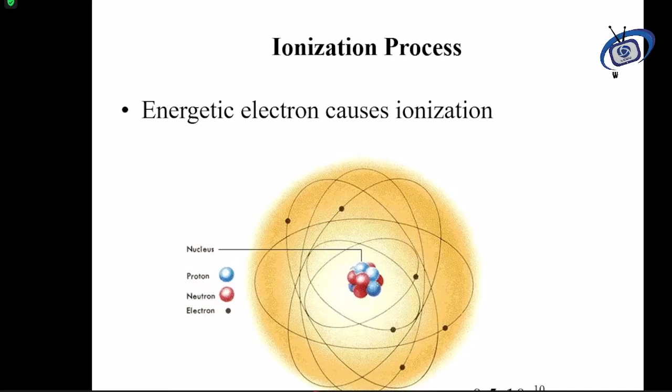No, sir, it's okay. Okay, so today I'm going to talk about the deposition of oxide thin films using a plasma system. So I start from the very basic thing, which is ionization. In ionization, basically you give energy to the electrons and they leave the atom, and the atom becomes ionized. So this is the basic part of the plasma, this ionized gas. And there are three processes occurring in the plasma: absorption, spontaneous emission, and stimulated emission.

And when we define plasma, plasma can be defined as an ionized gas, but not necessarily is every ionized gas a plasma. The ionized gas should have two kinds of properties. Number one is the collective behavior, and the other one is quasi-neutrality. If any gas has these two properties, you can call it plasma. So plasma is not a neutral, but a quasi-neutral system.

In plasma, we have long range forces and short range forces. Long range forces are basically responsible for the collective behavior, which is Coulomb's law. And that is the very basic part of the system. The other one, the short range forces, occur when two atoms or molecules fuse together. Repulsive and attractive forces occur, and this formula is given here.

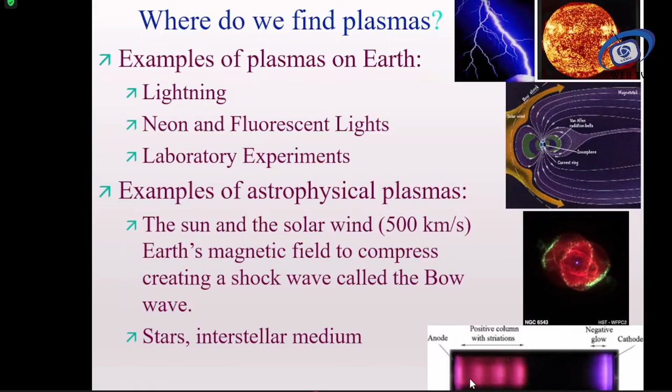So why are we interested in plasma? The first and foremost thing is fusion energy, which is a potential and safe energy, and it is abundant on Earth. The other one is astrophysical plasma: whenever you go out of the Earth's atmosphere, you actually interact with plasma. So understanding plasma helps us to understand stars and stellar evolution, which is an important part of astrophysical

systems. The upper atmospheric dynamics of the Earth: the upper atmosphere is plasma, so it is used in communication systems. So we can say that this is also important. And the other plasma applications which we employ here in the lab: plasma can be used to build computer chips and clean toxic waste. And I'm giving two diverse applications.

There are plenty of applications. We work on non-equilibrium plasma used in the processing of materials. In plasma, we can use chemical synthesis, plasma spraying, diamond film deposition, and ceramic powder. You can make plasma out of that, and then you can deposit it on the systems. Light sources, high intensity discharge lamps, low pressure lamps are being used in the world now, and special kinds of light sources as well.

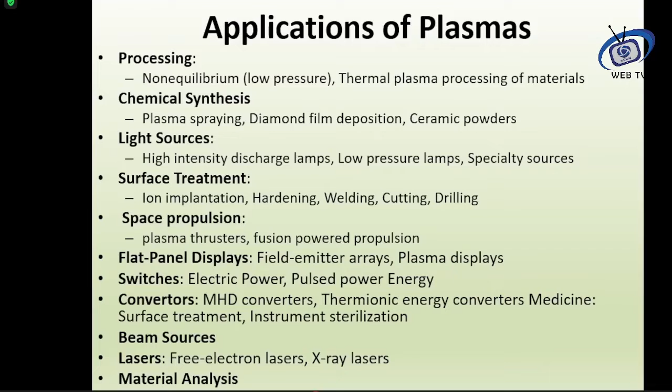So it can act as high power switching, and converters, magnetohydrodynamic converters, thermionic energy converters, surface treatments, instrument sterilization, and lasers: free electron lasers, X-ray lasers, and all kinds of gas lasers. They contain plasmas. High power radio frequency sources, even material analysis. With X-rays, you can analyze the material.

And microelectronics devices; there is plenty of work going on in the world. Fluorescent lights, television, displays are estimated to be a $200 billion business. And the semiconductor industry is a $250 billion business, where it is used in different kinds of setups. Without it, the $2 trillion telecommunication industry would not exist. So plasma technologies are serving them. Also biocompatibility of surgical implants, sterilization, and plasma-aided surgery devices.

Plasma can be divided into two main groups. Number one is high temperature plasma, and the other one is low temperature plasma. But it is further divided. High temperature plasma means the temperatures of electrons and ions are almost equal, and the electron density is greater than or equal to 10^20 per cubic meter. And low temperature plasma means the temperatures are almost equal, though the temperature is about 2 × 10^4 Kelvin.

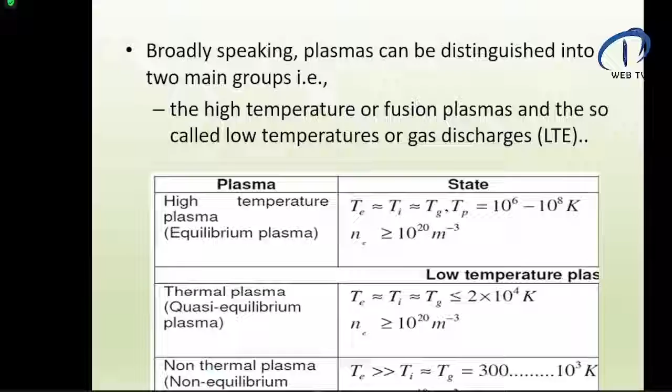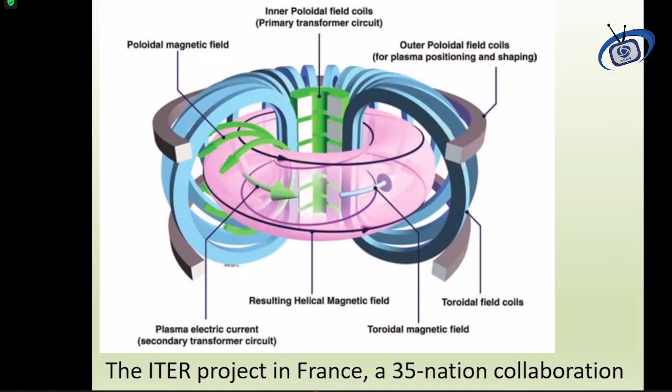Fusion is when we use deuterium and tritium and heat them to 150 million degrees. We receive neutrons and helium, and the neutrons carry the energy. Presently fusion is important because the ITER program in France is a 35-nation collaboration. They are designing it with a $20 billion budget, so it's a huge project, and they think they will be making a reactor for energy.

So fusion energy matters all over the world, because energy consumption all over the world is increasing. For example, China used 120 gigawatts, but now they are using 500 gigawatts. In 30 years' time, they increased almost 4 times. And India has increased even 5 or 6 times. So we need an energy source which can give us this kind of energy.

So plasma can be confined in 3 basic different methods: magnetic confinement, using magnetohydrodynamics, for example the stellarator; gravitational confinement, which is present in stars and suns; and inertial confinement using lasers.

So inertial confinement, you have a laser from the 4, 5, 6 sides, and it compresses the plasma, and then can have it raise the temperature about 100 million degrees centigrade. So we can have then plasma over here, and we can use that energy for the reactor.

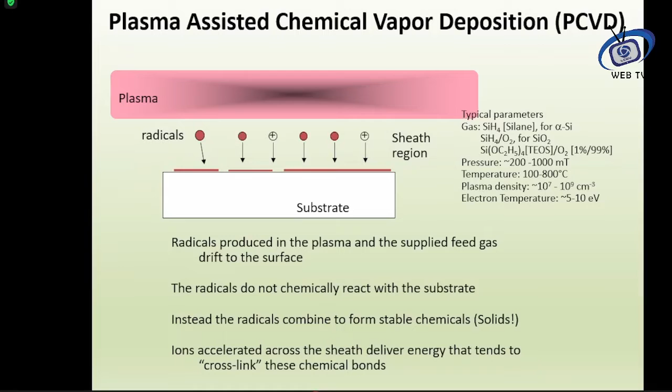and the ions coming from the plasma, they interact with the substrate, and then they become part of the substrate. And radicals, because they don't have so much energy, so they react in the plasma but not on the substrate. So they will form cross-linked, and then the film grows on the surface.

and during that they pass through the plasma, and they have some kind of reaction with the plasma species, or they will then adsorb to the substrate and then diffuse into the substrate, and they form the nucleation and the film forms. Nucleation occurs and the film forms onto the substrate.

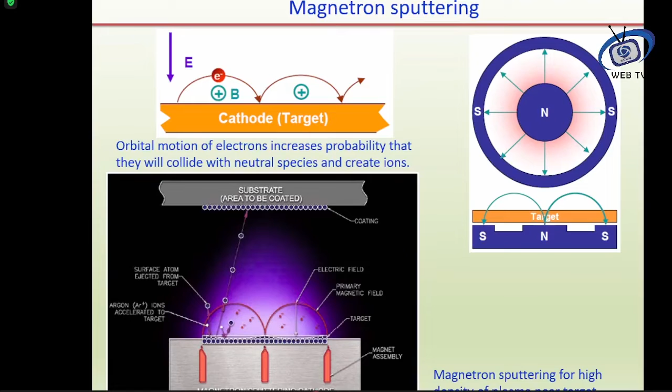So the other part is the radio frequency plasma system. So radio frequency plasma, basically we have a sinusoidal kind of power we are applying to the electrode. So this means that now we don't have a fixed cathode and anode. In one cycle, one electrode becomes cathode, and in the other cycle, the other becomes the cathode. So this means that the plasma now oscillates between them.

And the important part of the radio frequency plasma is that it actually deposits material even if we don't have a conducting electrode. So that is the most important feature, so it can deposit material without considering the metallic electrode, or even an insulating substrate or material or electrode.

So we had a radio frequency system, and we have a DC magnetron system here. We have two kinds of system present in our lab, and the dense plasma focus is another one which is present, and we are using that system for the deposition of material. Since it is high temperature, high density plasma, we use the dense plasma focus to deposit material.

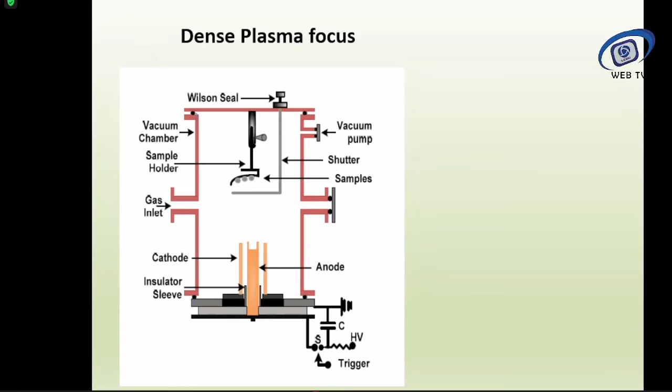It can deposit any sort of material you can name. So we have different kinds of biomedical applications I already explained. So this is the usage in hip-knee prostheses.

About 1 million people have been using that, and with plasma we can make surfaces bio-friendly. So we can deposit hard coating films like titanium nitride, aluminum nitride, titanium carbide. We can see that the hardness of the film is increased, so the life of the tool has increased.

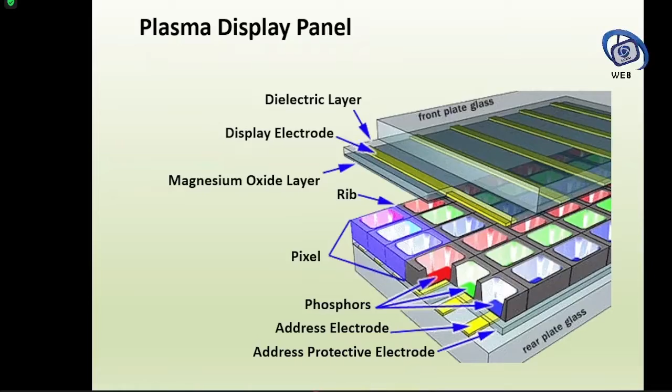Plasma display panels. So this is the plasma display panel. Here we have an electrode, the address electrode, the protective electrode, and this is the phosphor screen, and this is the pixel. We have magnesium oxide layers here, the display electrode, dielectric material, and the front plate glass. This is how it actually works.

The voltage creates an electric field, and we have xenon and neon gas releasing UV light, and the photon interacts with the atoms, and it interacts with the phosphor screens, and then we can see the light onto the screen.

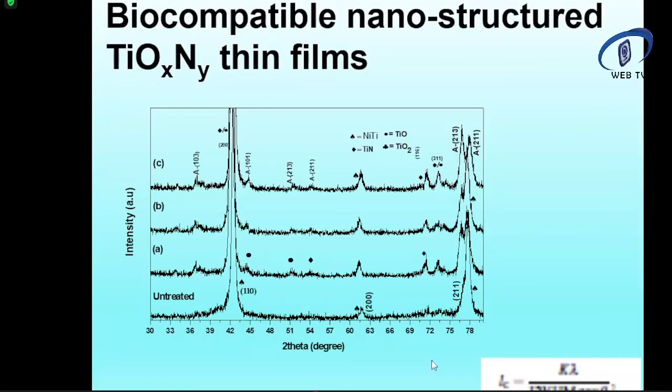We developed a simulated body fluid, which is almost like the body fluid. Nickel ion release was checked by placing our film in the SBF, the simulated body fluid. After immersion time, we have seen that after 3 days, nickel titanium alloy has 4.8 microgram per liter nickel release, and in sample number 1 it actually goes to 0.161 nickel. Nickel is dangerous for the tissues.

So we're trying to minimize the release of nickel. Nickel release with sample number 3, when flow rate increased, is actually 0.092 microgram per liter. After 7 days, it goes to 0.107, at 21 days it's 0.3, and even at 35 days we have 0.3 microgram per liter. So we have seen that the nickel release has been decreased by using plasma deposition of the titanium nitride.

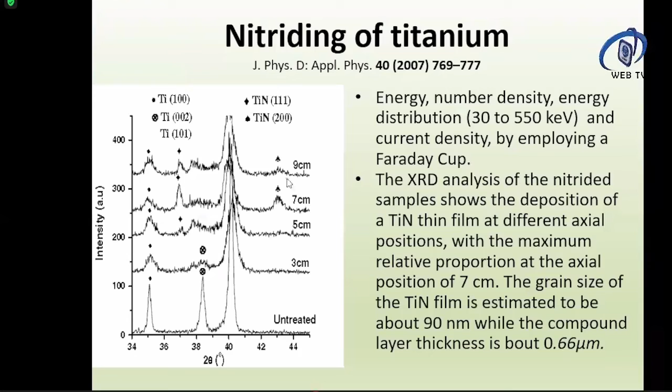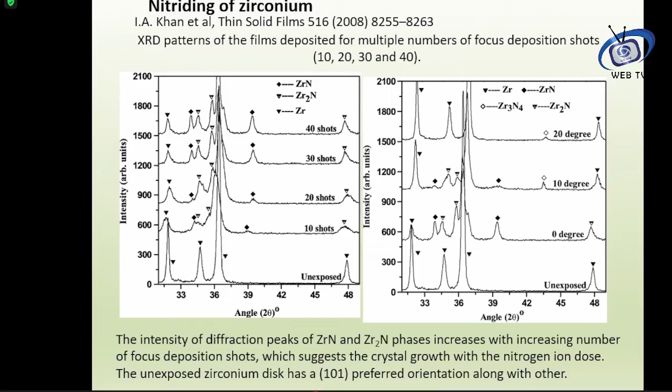And then we have zirconium nitride. This is also an example. The zirconium film is a similar film type, titanium has similar properties because it's a transition metal. So zirconium nitride has been deposited, and here we have increased the Vickers hardness by past 400%, micro hardness of the nitride sample, which means it is even better than the titanium nitride.

Then we deposited a zinc oxide thin film. Zinc oxide is the most researched material, and people are still working on it and publishing a lot of papers, because of its various applications. It can be used in light emitting diodes, laser diodes, solar cell systems, even gas sensors, high mobility flexible transistors, antibacterial coatings, drug delivery, and surface acoustic devices. So it has a lot of applications, and zinc is a cheaper material.

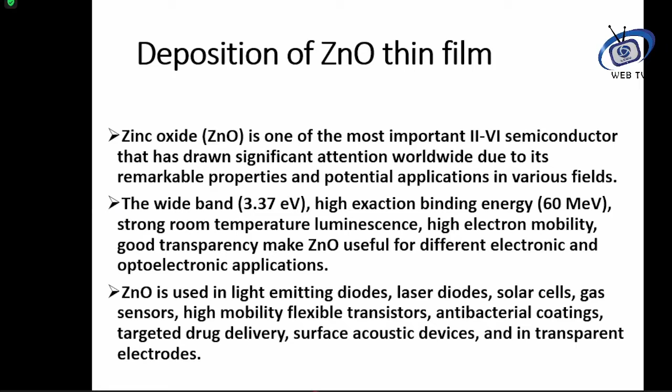So people are actually working on the zinc oxide film. Zinc oxide is an important semiconductor, with important semiconductor applications. It has a wide band gap, about 3.37 electron volt, and a binding energy of 60 milli electron volt.

So we deposited the zinc oxide film, and after deposition we implanted various kinds of metal ions: aluminum, indium, nickel. We also used silver, copper, and nitrogen because they act as an acceptor impurity in the zinc oxide, causing a reduction in the band gap and resistivity of the film. Nickel and cobalt were useful to obtain dilute magnetic semiconductors. I'm giving only one example, which is the copper doping.

Copper doping is important because various people have worked on copper doping of the film. The band gap of the zinc oxide was increased with increasing copper plus concentration. This is the paper published by Saidani et al. Other people observed that copper-doped zinc oxide exhibits strong potential in the field.

Shukla et al. published work on the sensing properties of copper doped zinc oxide crystal, and they found that the transmittance of the films increased significantly after doping, whereas the optical band gap of zinc oxide reduced from 3.28 to 3.18.

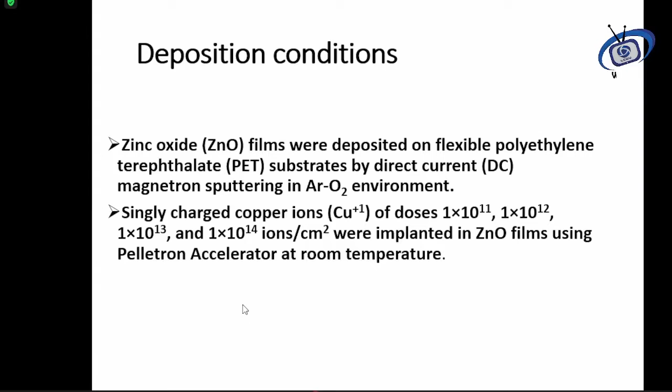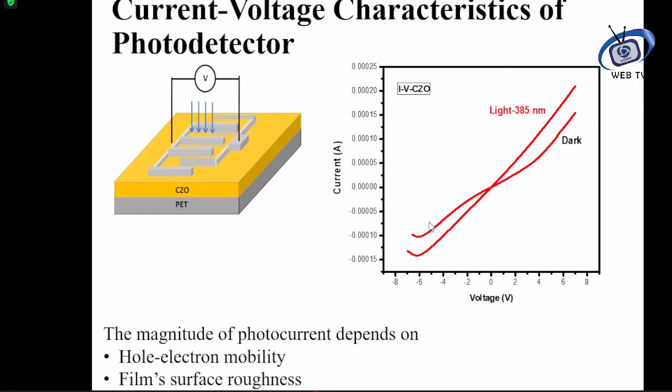Then we checked the responsivity of the film, which acts as the photodetector. This is I over E, where I is the photocurrent, divided by E, the light irradiance from the UV light, and A is the activation area. The responsivity was measured for the fabricated nickel contact, nickel being the metal film deposited onto the film for connection.

So for the nickel, zinc-copper oxide, nickel photodetectors at 7 volts, we got 921 milliampere per watt, which is very good compared to other results. We also checked the quantum efficiency using the formula 1.24 R over lambda, where lambda is the wavelength of the UV light. The value of quantum efficiency at 7 volts is 219%, which is again very significant.

Then we checked the response time. When UV light is not present, the current is 6 microampere. When we turn on the light, the current suddenly increases. This gives us the response time. We can see that the response time at 1 volt is 1.71 seconds, and at 7 volts is 0.52 seconds.

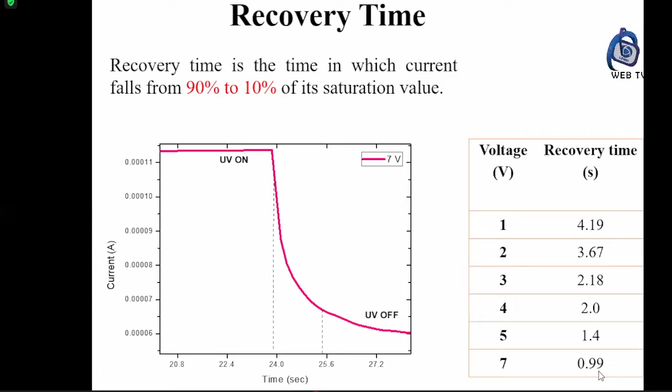So this is, I think, the last slide of my work. If you have any questions, kindly ask.

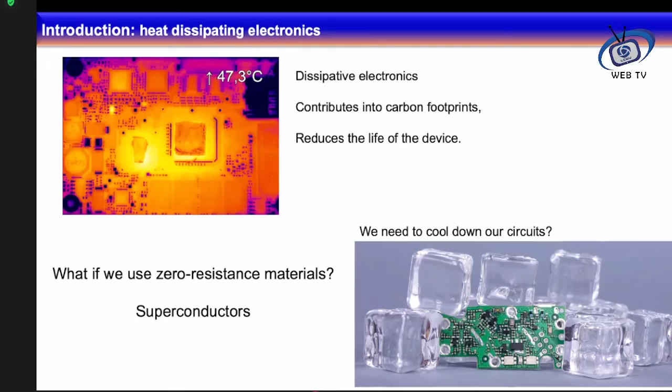So there could be another solution: if we use materials that are zero resistance materials, such as superconductors. But if we use superconductors, it means we will actually work at low temperature. And then the major question is how we can use the superconductors.

Based on this idea, very recently IBM started a very big project to develop a superconducting computer. Right now Amazon and Google have also started superconducting computing, including superconducting quantum computing. The quantum computers we have also work at very low temperature, utilizing the concepts of superconductivity, but the temperature is still pretty low.

The components we need to process information are mainly a transistor and a diode. These two major devices can perform switching, and then you can develop the bits, the gates, and do all the gate operations using these two main devices. So my focus right now is on the diode and how it works.

We know the diode allows only one directional flow of current. For example, if we connect this diode this way, here is the positive side, here is the negative side, and you can very easily cross this barrier. But if you move in the other direction, you will face a strong and sharp barrier, so you cannot cross it. So this flow is only one directional—in terms of the bit, we are 1 here and 0 here.

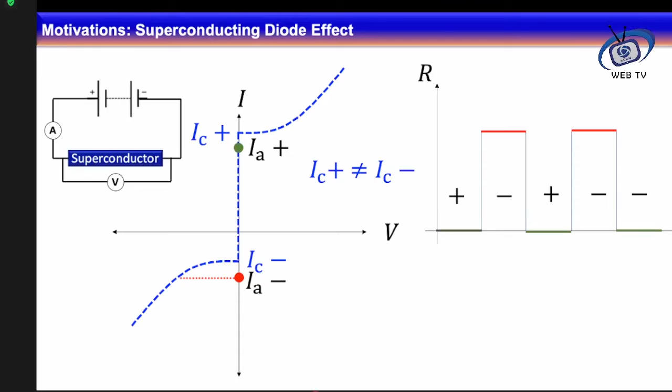So it means that this is like a diode: in one direction you have a supercurrent and in the other direction you have a normal current. So this is the very simple and straightforward concept of a superconducting diode. And very recently, 2 years ago, at Kyoto University, Professor Ono established this device.

Practically, what they did, they prepared a superstructure, and in this superstructure they used tantalum, niobium, and vanadium. These three are individually superconductors. But if you grow just 1 nanometer of any of these three materials, it will not be a superconductor because it is too thin. But if you grow them on top of each other, you are increasing the thickness, and then the superlattice would work as a superconductor.

And here they used 40 layers. The 40 layers means that the total thickness was 120 nanometers. And another very important point is that these three layers are not symmetric, meaning they are like an A, B, C structure. For example, let's consider that I have niobium here, then vanadium, and next it should be niobium, then it would be a symmetric structure, but it is a non-symmetric structure.

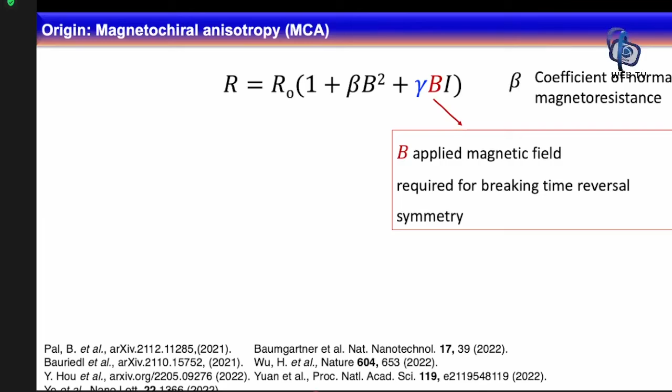But this gamma function, as I already explained in the last structure, they intentionally developed an asymmetric structure where the inversion symmetry is broken. In that case, we would have the spin orbit coupling, and this gamma coefficient in principle depends on the spin orbit coupling. So if you have these two broken symmetries, number one, the inversion symmetry, and number two, the time reversal symmetry, both must be broken, then you would have this chiral magnetoresistance.

Okay, in the normal metal, our parameter is the Fermi energy, and Fermi energy is very high compared to spin orbit coupling. So this chiral magnetoresistance effect will not be that strong there because the spin orbit coupling is not really efficient. But in superconductors, the energy term is the superconducting gap energy, which is on the order of milli-electron volts instead of volts like the Fermi energy. So in a superconductor, spin orbit coupling has to compete with this gap energy, which is not very high, so the effect of spin orbit coupling must be very strong. In this way, we can very easily get this non-reciprocal transport.

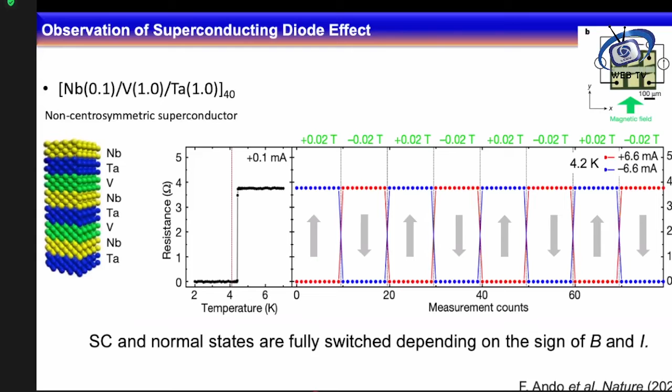And interestingly, there is a type of superconductivity that we call non-centrosymmetric superconductor. By the name, you can understand that the crystal has broken inversion symmetry, so those superconductors intrinsically have very high spin orbit coupling. This upper structure which I showed you here is also a type of non-centrosymmetric superconductivity. However, these other superconductors, though they were used to develop this superstructure, are normal centrosymmetric superconductors.

Very recently, just a few months ago, researchers from Delft University developed a superconducting device that you can call a Josephson junction using 2D materials. They used niobium diselenide and niobium bromide. This Nb3Br8 is a magnetic material; it can also work as a ferromagnetic material.

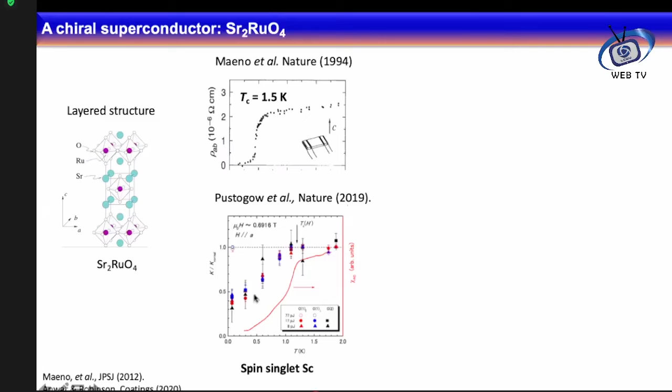But then there was the observation of the internal magnetic field in this superconductor below the superconducting transition temperature. So that means that in the superconducting state, this superconductor has magnetism, meaning there is a magnetic field inside. So this magnetic field means that this is not a normal superconductor. It is an unconventional superconductor that has an internal magnetic field, meaning the time reversal symmetry is broken, as it is broken in ferromagnets.

And then by combining all these results and our recent research, it is established that this superconductor should be a chiral superconductor, meaning that its order parameter is continuously changing with the direction, and that breaks the time reversal symmetry. Then I selected this superconductor. For this superconductor, we can grow very nice single crystals. Thin films are difficult, but the single crystals we can grow to a very high quality.

And when we grow this material, we get the single crystals in this way: here we have the Sr2RuO4, but there are also some bright parts. Those are the ruthenium metal. So this ruthenium metal is embedded. These are the inclusions. And if you put any other metal on top of this superconductor, then the electronic connection between the metal deposited on top of this single crystal is very bad.

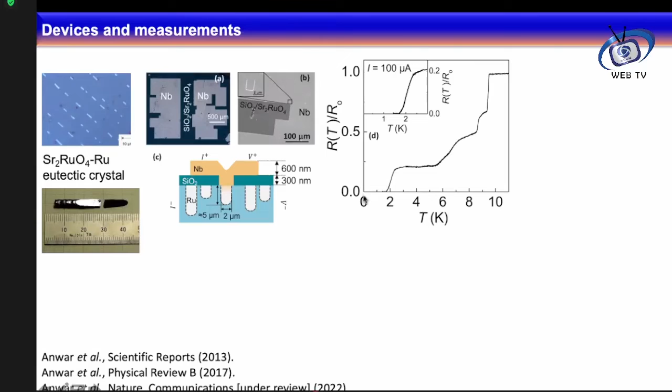On top of that, I deposited another superconductor, which is a normal superconductor, niobium. So now this is a device between a normal superconductor and a chiral superconductor, a superconductor that breaks time reversal symmetry. Now this is also a Josephson junction. And in this junction, we can observe very clearly a zero resistance state, meaning the superconducting state, which you can see in this resistance versus temperature graph. Now here, if we measure the IV curve, you can see that we have this superconducting IV curve.

And then the other interesting thing was that if we increase the temperature, meaning that we are weakening the superconductivity, we are moving toward its superconducting transition temperature, where it will switch back to the normal state, this effect is suppressing. A very clear message here is that this superconductor, which is an unconventional superconductor, exhibits non-reciprocal transport, that is in fact the diode. And this diode effect is suppressing with the increase of the temperature.

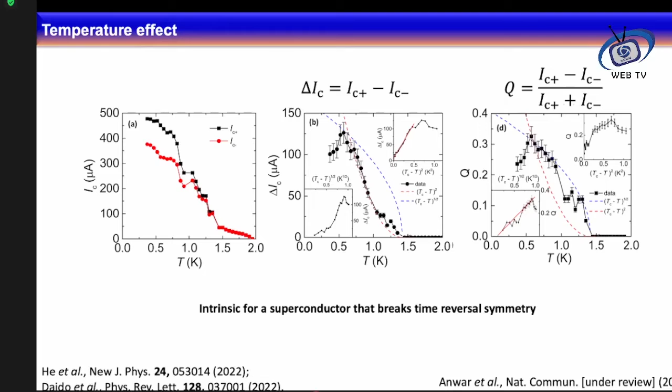But still you can try, just switch over here, to understand what will happen if you apply the magnetic field. If you apply the magnetic field, then in our devices we observed that the critical current is not stable. It is quite unstable. And then I switched off the magnetic field, but then my device was in this configuration. Let me explain it in a simple way. We applied magnetic field, then we switched off the magnetic field. There is no magnetic field, but the effect of the magnetic field is still there because it was in the superconducting state.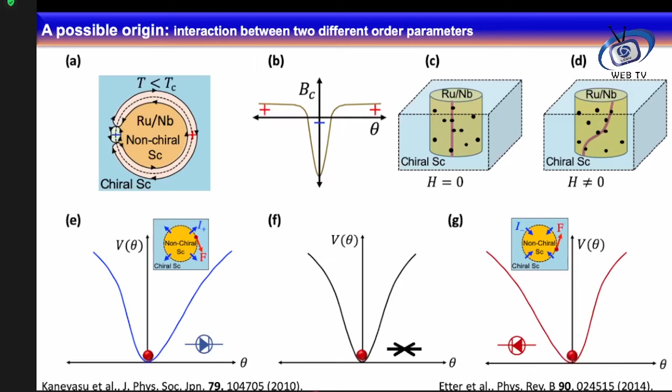Let me summarize my work: we have observed the field-free superconducting diode effect in the unconventional superconductor strontium-2 ruthenium-4. The effect is random with respect to the applied magnetic field and cooling cycle. Theoretical models explain it very well. So now we have established a technique which can also be used to test unconventional superconductors for time-reversal symmetry, which is a very important parameter for superconductors.

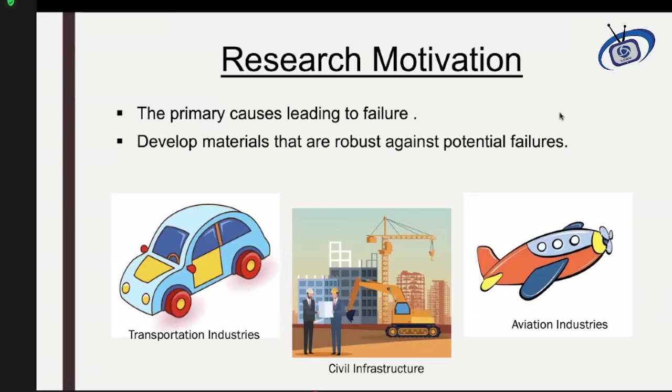So basically buckling is a mode of failure which we are going to deal with here. All the theories that tell us about material failure give us the basic conditions we can employ to find out the modes in which a material buckles. There are different failure mechanisms whenever a material fails - it can be through fatigue, creep, fracture, or through buckling.

So the behavior of the material under tensile load and compressive load is very important to understand in order to find more about the buckling. A material under tensile load, meaning a stretching force is applied, will undergo elongation. So cables, cranes, threads, ropes - all materials under tensile load behave in that stretching mode.

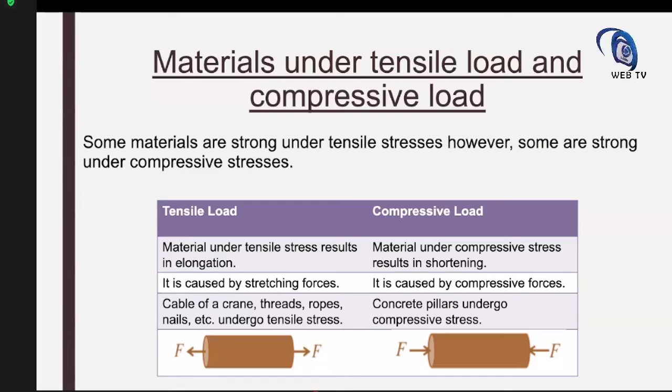But all materials under highly compressive load, for example pillars and columns, undergo compressive load. These figures indicate examples of materials we usually encounter in service under tensile or compressive load, meaning the material application is in some active use.

For example, bridges, which are constantly under the load of vehicles, are under compressive load. So it is very important to understand whether the material can withstand the compressive load that the vehicle crossing it imposes or not.

Here is an example of a tug of war rope, which is under elongation - tensile strength is very important in that case. So we will observe the rope under tension, whereas in the case of the bridge, which is under compressive load, we will look at the material for compressive strength. So as we have seen, for buckling we need to explain that it is one of the material failures in which the material is under compressive load.

Whenever we talk about material failure, sidewise deformation or bending of a material under compressive load will lead to a specific kind of failure, which is called buckling. So buckling basically depends upon the instability of a material, which takes place whenever the material is under compression.

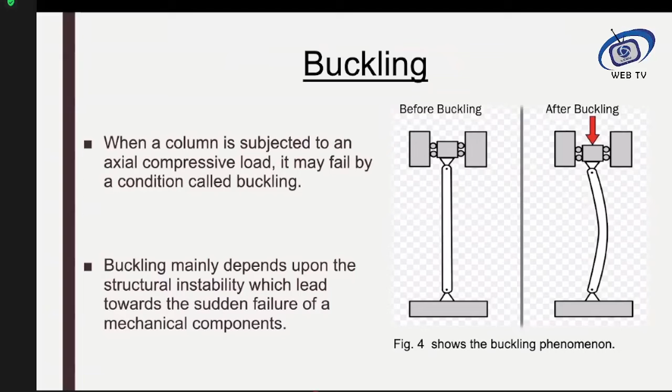Here are some practical examples in which we are very much concerned about materials, columns, or members of columns or pillars buckling under compression, which is applied onto different kinds of structures.

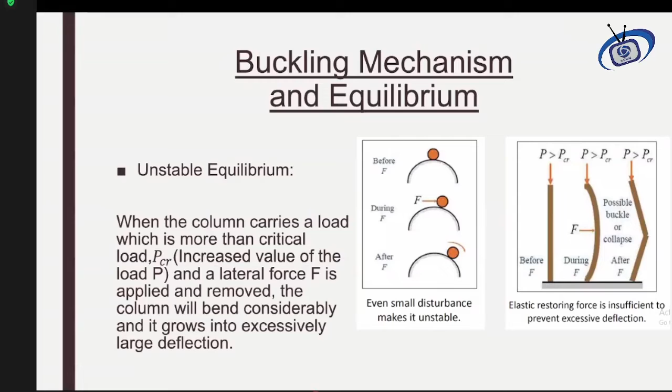So buckling basically depends upon the instability of a material, which takes place whenever the material is under compression applied in different ways. Here are some practical examples in which we are very much concerned about the materials, columns, or members of columns or pillars, and the buckling they undergo.

Exact equivalence is made between the load on the material and the critical load. If they are exactly equal to one another, then after the removal of the force, the bending which has produced into the material will remain, and there will be no exceeding deformation into the material.

So this is the physical meaning of buckling. From the examples we have seen, materials under all types of compressive loads, specifically those used in applications like long pillars and cylinders, can undergo buckling, which is a sidewise bending or deformation of the material.

So it's very helpful to analyze the theoretical analysis of buckling. Euler buckling analysis is one of the authenticated ways to find out the critical buckling load, which can be calculated by this theorem and can be helpful for finding the critical value at which the material will start buckling.

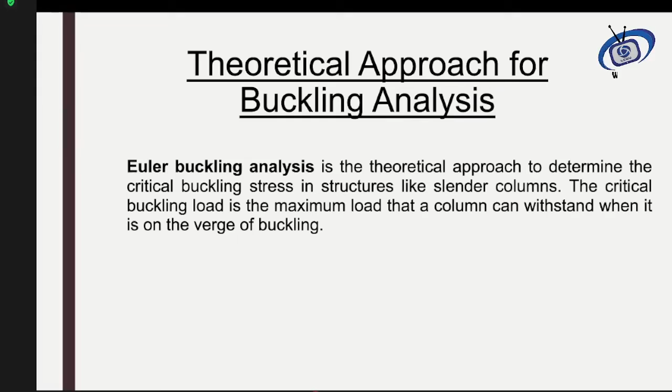This formula was derived in the 18th century, and according to this formula, there are certain assumptions which need to be made when we are talking about the application of Euler buckling analysis.

We need to consider that the column or pillar on which we are going to apply this critical buckling analysis should not be deformed initially - it is in its original state. Secondly, there is no other failure mechanism present, like fatigue, creep, or cracks and fractures. So these are not present, and the cross section is uniform throughout, with the force applied uniformly.

The material on which it is applied is isotropic or homogeneous, and it very much depends upon the pinning conditions of the column. So the columns are pinned on both ends, or loose on one end and pinned on the other, pinned in the middle, or pinned at the extreme ends. All these are very important - the ends of the columns and their status matter greatly.

According to this critical buckling formula, the critical buckling load, represented by PCR, is directly related to E, the Young's modulus, and I, the cross-sectional area, and is inversely proportional to the square of the length.

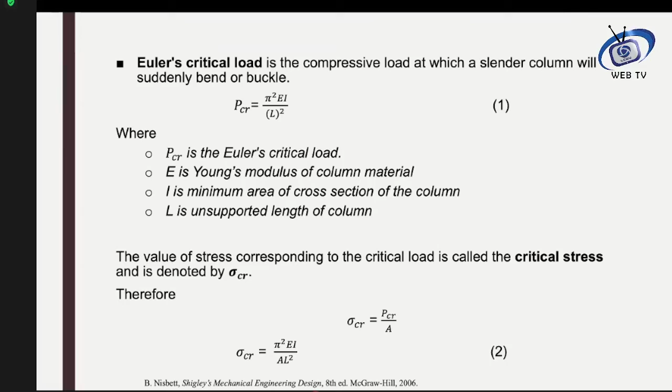So in order to deal with such material failure in the form of buckling, what kind of materials can be suitable for it? In order to avoid material failures, there is great interest these days in nanocomposites.

Before going into details of nanocomposites, composites are simply defined as materials which have properties that make them light, strong, flexible, and durable. The idea of composites starts very early in the history of mankind, when we observe that natural structures like wood and bones are made up of two or more materials.

We talk about naturally occurring composites, and then we'll talk about man-made composites. Naturally occurring composites are all those which mankind observes all around in nature.

For example, wood is made up of this concept of the composite. Bones are made up of this structure of a composite. In which one material is working as a base material and the other is working as a reinforcement, or basically a filler material. So the fibrous structure of the cellulose is working as an inclusion in a matrix of lignin in the wood structure.

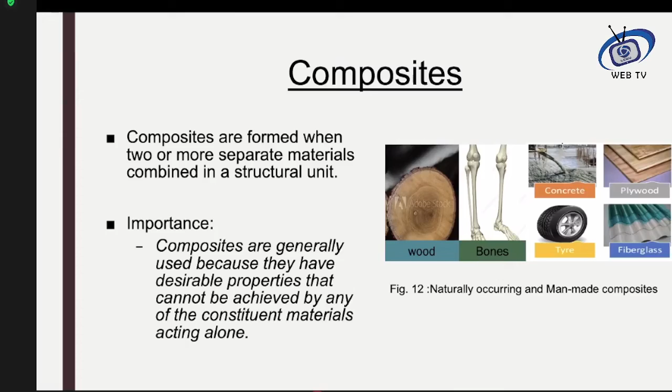Looking into this kind of composite structure, mankind started to work upon manufacturing its own, or fabricating its own man-made composites. The history tells us that the first construction material which was introduced in the form of a composite was the use of straw to enhance the strength of mud.

Whenever simple mud was used in construction, it was always observed that cracks are produced in it. In order to avoid these cracks and to give more stability to the structure, straws were added, or different fibers were added into the mud, or raw material was added to the mud.

To provide more strength, it then came toward the brick structure, in which we have seen that whenever different materials are mixed and matched together, new properties of the composite or added materials are obtained.

These days, different structural composites are used, including steel reinforced composites and polymer reinforced composites, in which the materials are reinforced, like polymers reinforced with the help of glass fibers or carbon fibers to give new or additional properties of material.

Specifically, if inclusion or addition is made into a base material with respect to the mechanical properties, then the particular terminology used for this is called reinforcement.

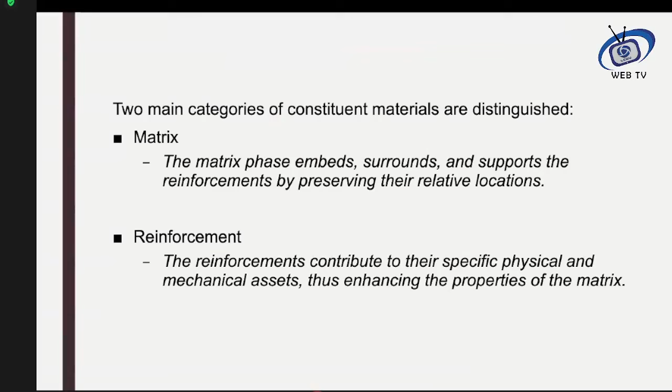The matrix is the phase which is basically in bulk form, and it's basically surrounding the addition or reinforcement. It provides support to the other material added into this matrix phase. So reinforcement contributes to the basic physical or mechanical properties, and it is added in a minute quantity to the matrix.

Classification of composites can be done on the basis of many parameters. If done on the basis of the matrix material, we talk about polymer matrix composites, metal matrix composites, and ceramic matrix composites. All known materials, if used as polymer, metal, or ceramic as a matrix, are called polymer matrix composites, metal matrix composites, or ceramic matrix composites.

As we know, for structural composites, ceramic, cement, concrete, and such kind of mortar or cement paste are used for structural infrastructure. That's why today we will talk about material failure, a particular phenomenon of buckling in the cement matrix composite, which belongs to the ceramic category of composites. If we talk about classification of composites on the matrix basis, we can classify it as polymer, metal, and ceramic matrix.

But if we classify them on the basis of the addition or inclusion we have made, which we are calling a reinforcement, then the reinforcement can be added in the following forms: fiber, particulates, structural, or whiskers. All of these can be added into the composites to get new or improved properties of the material. If fibers are added, they may be continuous, short, or a combination of more than two types of fibers.

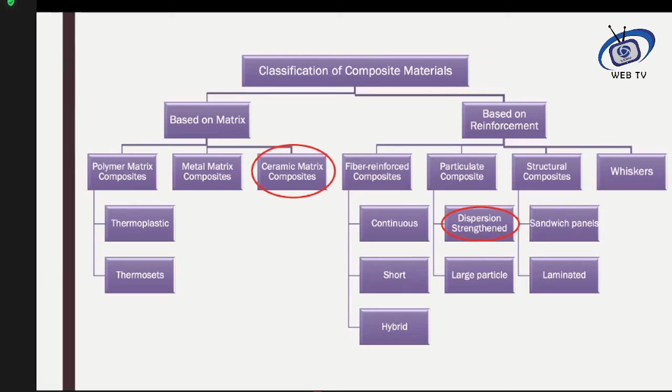So structural composites are basically those composites which are formed by changing from one layer to another layer. And whiskers are those materials which are single crystals which can be added as a reinforcement. Here we are only going to focus upon the particulate as a reinforcement in this work.

Ceramic matrix composites, CMC, are cement matrix composites or ceramic matrix composites. They are basically the traditional structural materials which were used in the form of clay or cement. Advanced ceramics are used in terms of carbides and nitrides. Here we will focus on these traditional structural materials as cement.

Cement is a fine binding powder which alone is not used as a construction material. It is always used by forming its paste with sand, or in the form of concrete, in which grains of pebbles are also used. So cement itself is a fine binding powder, and its paste can be formed with water. In construction, cement paste along with concrete and mortar are all used.

These three terminologies are interchangeable and used in structural and infrastructural applications. Cement paste means the cement powder making a paste with water. Mortar means sand is added to the cement powder for construction purposes. And concrete means some other inclusion in the form of particulates is also added into this mixture.

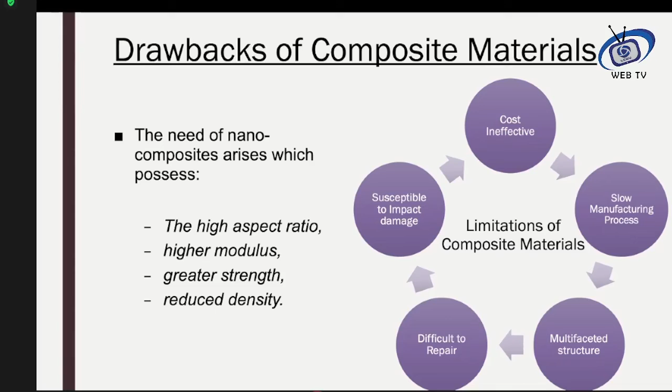Nanocomposites obviously refer to nanomaterials being added into these composites, where one of the materials added into the composite is in the nanometer range. Their high aspect ratio, higher strength, and lower density are the famous properties that help give new and improved properties to nanocomposites. The materials extensively used as nanomaterials are carbon nanotubes, layered materials, and buckyballs. These were the materials initially used in nanocomposites.

So what is the role of nano reinforcement in material failure? How can we say that by adding nanomaterials we get robust resistance against material failure? What property does nano reinforcement impart into the composites that can refrain them from material failure? Obviously their higher aspect ratio and their greater interaction between the matrix and the filler, or the matrix and the reinforcement. These are the two ingredients, and their interface plays an important role.

So how about graphene, a newly introduced material in the class of two-dimensional materials, as a nano reinforcement for cement? Some brief introduction about graphene. Graphene is the first experimental material in the class of two-dimensional materials, discovered in 2004 by the Manchester group, where I received my PhD degree under the supervision of these two scientists, and in the era in which they received the Nobel Prize, we were working there.

In history, graphene was not a new material. Graphite is a very ancient material which was used in different applications and was studied extensively. Its structure was considered in the literature, and a single layer of graphite was called graphene. But experimentally it was not possible to isolate it until 2004, when the experimental isolation was done. It is a hexagonal structure of covalently bonded carbons.

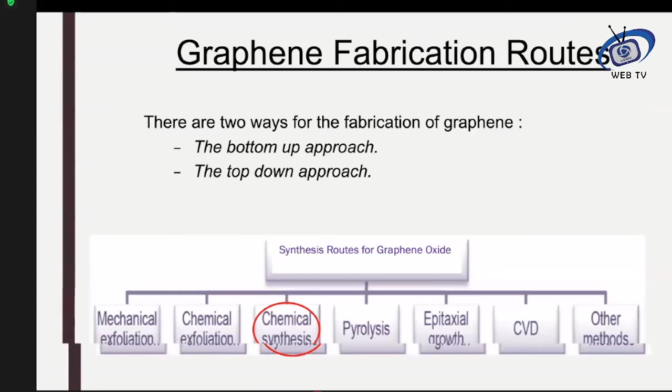What are the different fabrication routes used extensively for graphene fabrication? Mechanical exfoliation was the route which led to the first experimental extraction of graphene. Then chemical exfoliation, chemical synthesis, and epitaxial growth and CVD are other famous routes. Here we will be talking about graphene oxide, which can be very well extracted from the chemical route. There is more than one chemical synthesis route for graphene oxide, but one is easily used at lab scale.

Dr. Prasad, yes. Can you sum up your presentation? Okay. Can you sum up? Yes. Okay. Thank you.

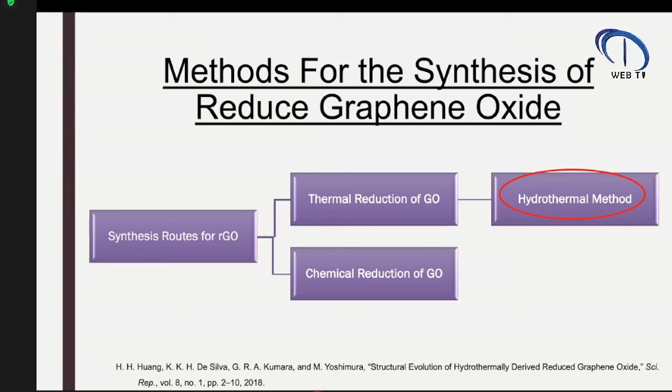The process used for the cement and RGO fabrication was the wet method, in which the powder was mixed along with RGO and some curing was done. Curing is the process in which the cement is left to stay and sprayed or sprinkled with water to settle down and reduce the loss of moisture from the cement.

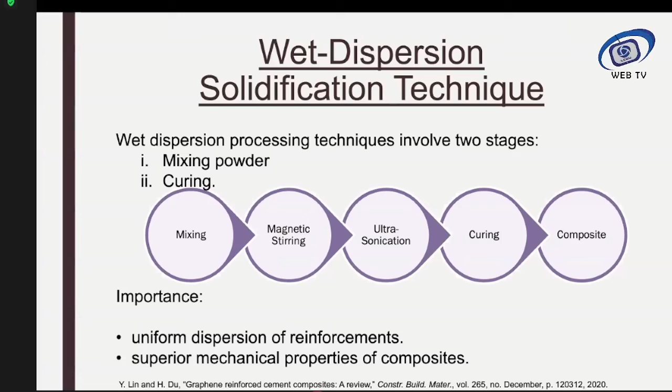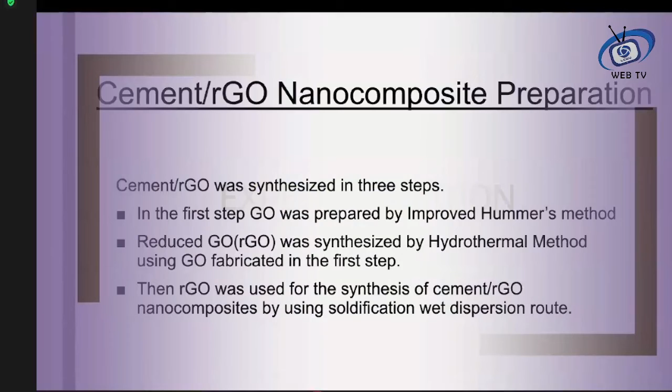Previous literature tells us that RGO is very well used as a nano reinforcement, basically adding properties to the material structure. Different ratios of RGO can be added for the cement nanocomposites. This is a schematic diagram showing how the improved Hummers method was used to produce graphene oxide, then that graphene oxide was reduced using the autoclave, and then it was mixed into the cement to produce these cubical cement blocks.

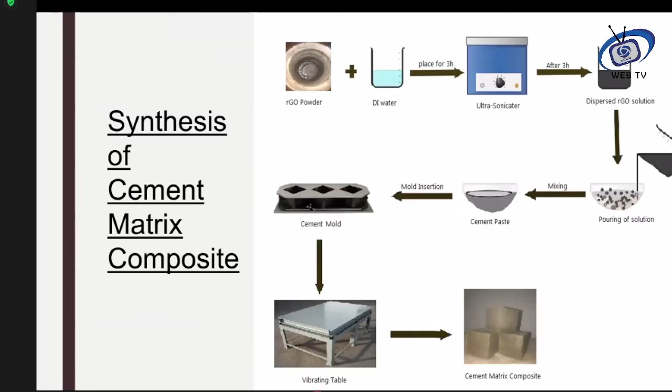One of the cement blocks, called the controlled block, was without the inclusion of the nano reinforcement of reduced graphene oxide, and the others were with 3 ratios of the RGO. The characterization techniques used for the inclusion of the nano reinforcement into this cement were FTIR, XRD, SEM, and then some testing with a UTM was done.

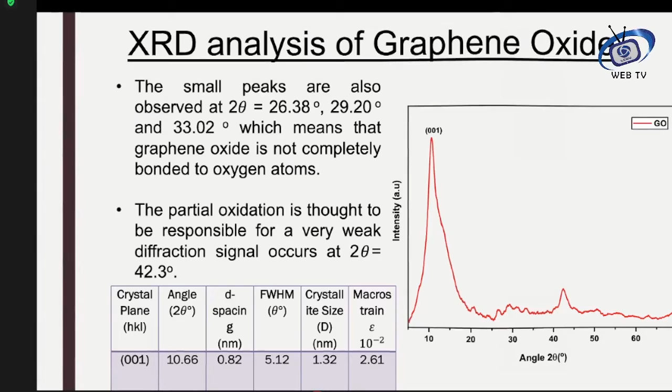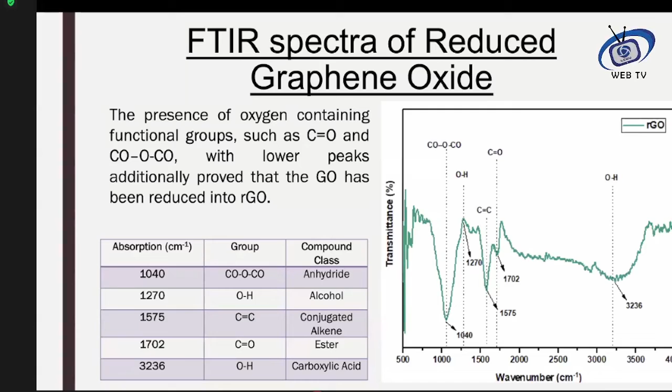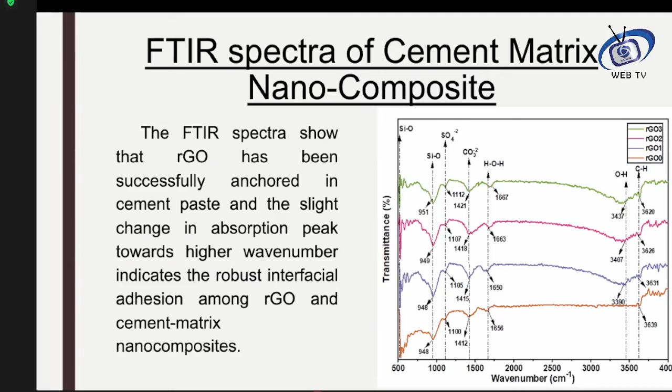Now, this represents the FTIR spectra of all the samples with the different ratios of RGO. Summing up, all these peaks represent that there is a proper inclusion of reduced graphene oxide into the cement. The peaks of the cement and the peaks of the reduced graphene oxide were present in this spectra, representing the successful inclusion of the different percentages.

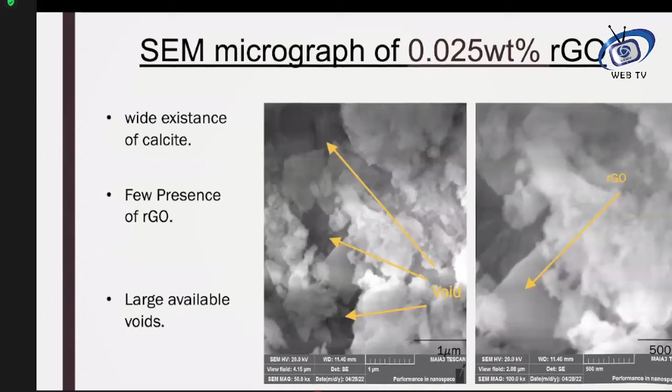The strength corresponding to these failure loads was also calculated by the machine, also showing that the inclusion of higher percentages of RGO increased the compressive strength. The theoretical analysis of the critical buckling load was also done with the help of the Euler buckling theorem, which shows that it is in good agreement with the experimental analysis.

The Euler buckling load was calculated in newtons, and the PCR value shows that the controlled sample has a load of 2459 Newton, which enhanced with the inclusion of RGO to 3105 Newton, a percentage increment of 26%. So in comparison with the control sample, a 26% enhancement in the critical buckling load was obtained theoretically, which was in agreement with the experimental one. They were more or less close to one another: around 26% theoretically, and around 23% from the machine testing analysis.

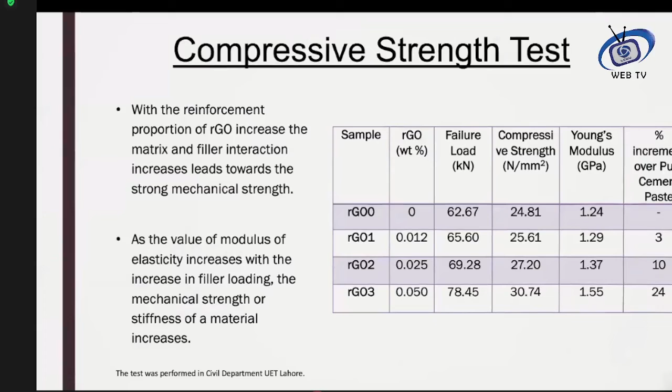So in summary, RGO is a nano reinforcement that can be added in different percentages to reinforce the cement, and can also be very effective in controlling the buckling phenomena.

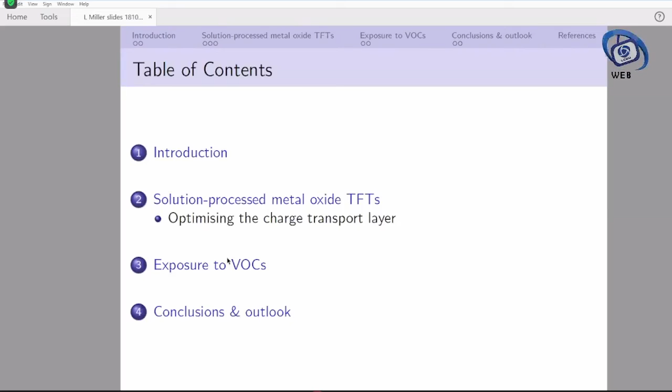I am firstly going to introduce my research aims and explain the operation of a thin film transistor. Secondly, I will discuss my results achieved to date, which summarize the effect of increasing the number of semiconductor or active layers and annealing temperature on electrical performance. Thirdly, I will describe the detection of VOCs by single-layer tin oxide and bilayer zinc tin oxide, or ZTO, thin film transistors. Finally, I will close with conclusions and welcome questions from the floor.

So over 200 types of volatile organic compounds are found in the human breath and are measured in the sub-parts per million range for a healthy individual. Abnormal concentrations of VOCs in exhaled gas from humans can be used as disease-specific biomarkers for the non-invasive and early detection of medical conditions, such as acetone for diabetes. Current technology suffers from poor selectivity and prolonged response times.

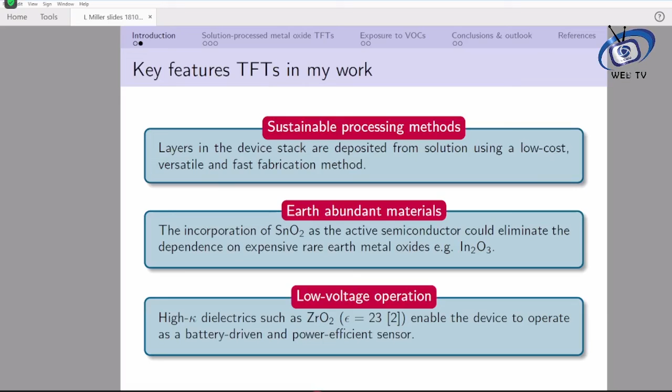At 0 gate voltage, no charge accumulation occurs at the semiconductor dielectric interface, so the device is turned off. For an N-type device such as this one, an applied gate voltage polarizes the dielectric silicon nitride, which causes the accumulation of electrons at the interface, and the device turns on.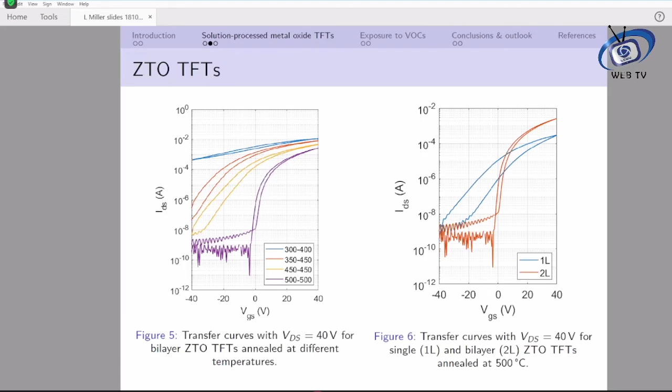The performance of single-layer and bilayer ZTO thin film transistors with all layers annealed at 500 degrees Celsius is shown in Figure 6. Hysteresis is significantly reduced with the addition of a second active layer, and the electron mobility achieved is the highest reported to date for solution-processed ZTO TFTs at 9.49 centimeters squared per volt per second. Next, I chose to fabricate tin oxide thin film transistors to compare against the literature, and tin oxide is also an ideal material for oxygen-related gas sensing.

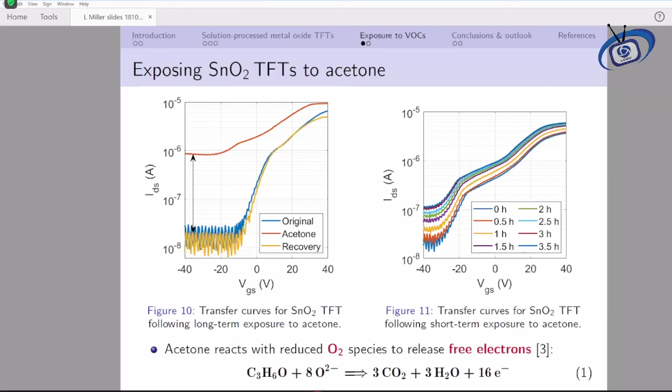Finally, bilayer thin film transistors annealed at 500 degrees Celsius were exposed to acetone and another reducing vapor, isopropanol or IPA. The second layer or open channel was varied to optimize selectivity. The 3 devices under test were therefore ZTO followed by another layer of ZTO, ZTO followed by zinc oxide, and finally ZTO followed by tin oxide thin film transistors. The change in drain current at 0 applied gate bias was computed and confirmed that the sensing mechanism was analogous, as the conductivity of the channel increased in every case following exposure.

To conclude, I have successfully fabricated metal oxide thin film transistors and extracted key parameters. I have achieved the highest mobility to my knowledge for ZTO thin film transistors. I have also found that annealing films at higher temperatures and spin coating an additional active layer resulted in improved mobility and near 0 volts turn on.

As a proof of concept study, tin oxide thin film transistors exhibited a highly sensitive and time-dependent response when exposed to acetone. Following on from that, heterostructure or bilayer ZTO TFTs were exposed to acetone and another reducing vapor, IPA, and the results supported these initial findings.

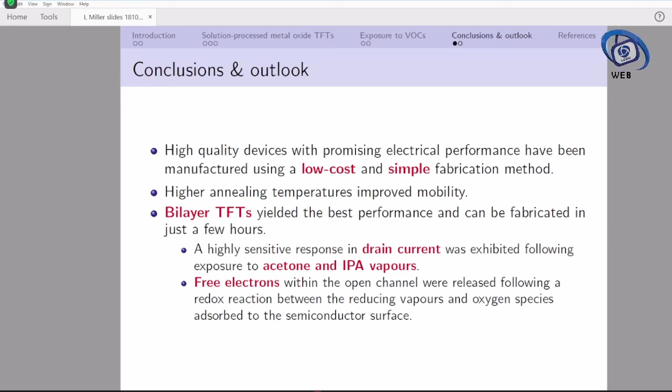Thank you very much, Ms. Lauren. Any question? Okay, it was a very nice and informative and beautiful talk given by you, Ms. Lauren. Thanks again. My pleasure.

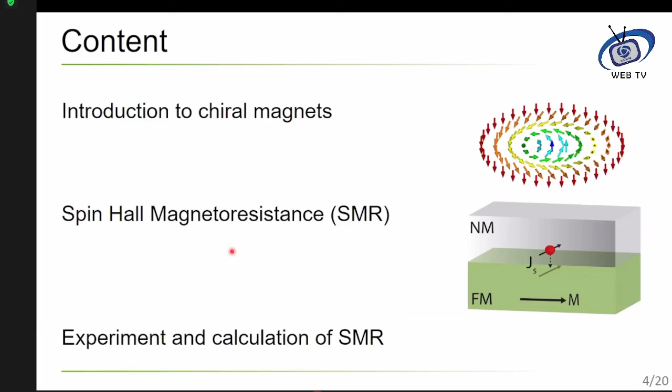Today in this talk, I would like to tell you about a special magnetic material. Then I want to introduce how we can find different properties of this material by a simple magnetoresistive method, and I will summarize. I'm an experimentalist, so my talk will be mostly about experiments.

Now, what are chiral magnets? My talk is really about a specific magnetic material, and compared to all other magnets you use in daily life, there is a difference of symmetry. Most materials, most magnets, are centrosymmetric, meaning if you apply inversion, there is no change. Their crystal structure stays the same after inversion or before inversion. They are totally the same.

However, there are few magnetic systems which have crystal structure just like our hands. If we apply inversion on our hand, either it's left-handed or right-handed, they cannot be superimposed. They are not identical. In the same way, there are crystals where you can see these magnetic atoms.

Here in this crystal, manganese silicide, the magnetic atom is only manganese. This manganese is placed in such a way that if you apply an inversion operation, moving one atom from XYZ place to -X, -Y, -Z place, they cannot be the same. You cannot superimpose them. They are either left-handed or right-handed.

This distribution of atoms within the system really triggers their special properties, and this is what is all about chiral magnets. So chiral magnets are simply magnets where magnetic atoms are distributed like our hands - they have a certain chirality.

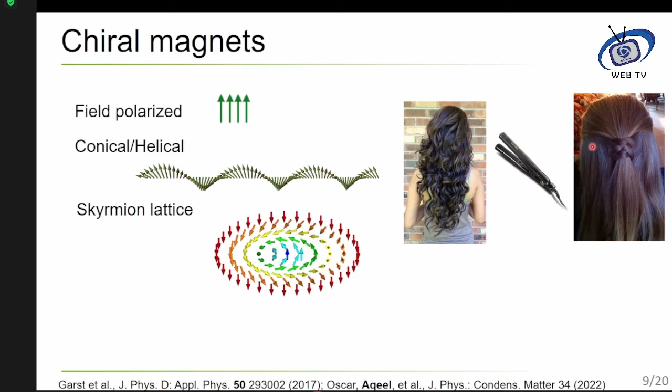They have a lot of similarities with domain walls, but they are robust - they are topologically protected, meaning their topology is much different. Coming from the phase diagram, all these materials form a small family with such a structure that magnetic atoms are distributed differently, and they all share this generic phase diagram. I am working on copper oxyselenite.

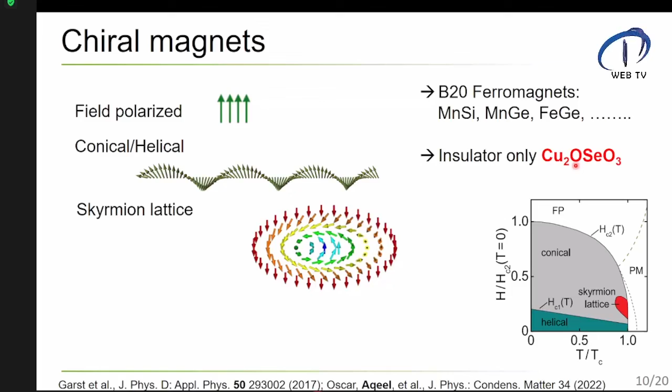Here, the magnetic atom is only copper and is distributed in some specific places. This is a magnetic insulator with very low magnetic damping. We grow these crystals, and they are very high quality. In terms of damping, it has 10⁻⁴ damping.

Damping simply means that if you send information inside a spin wave, it can travel a very long distance before it diminishes. Now I would like to introduce how we can detect these different types of magnetic structures by a magnetoresistive method. Magnetoresistance is a name used whenever the resistance of a material changes with an applied field, so we call it magnetoresistive.

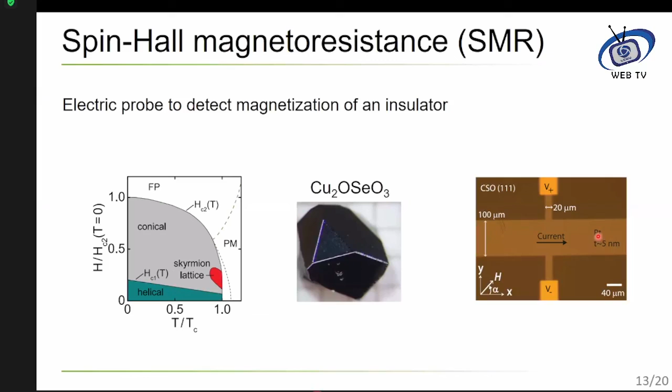Spin Hall magnetoresistance is a little bit unique. What we do is polish this crystal and put a very thin platinum metal on it. Platinum is very special—it's a very heavy metal and carries very strong spin orbit coupling. There is a spin Hall effect, which is different from the ordinary Hall effect.

In the ordinary Hall effect, you apply a perpendicular magnetic field, create some deflection of electrons, and get a Hall voltage. However, in the spin Hall effect, you don't need an applied magnetic field—if it's a heavy metal, spin up electrons deflect in one direction and spin down electrons deflect in the other direction.

This has a lot of consequences. What happens is you send a current from the normal metal, spin up goes here and spin down goes there, creating some accumulation. This accumulation can talk to your magnet. Although the magnet is a magnetic insulator and no current can go inside, only the spin can talk to the magnetization of the magnet.

When the spin is parallel to the magnet flowing into the normal metal versus when it's perpendicular, it can exert a torque called spin transfer torque. The resistance will be large when perpendicular, and when it's parallel, the spin will be reflected back and the resistance will be small. This is the basic principle of spin Hall magnetoresistance.

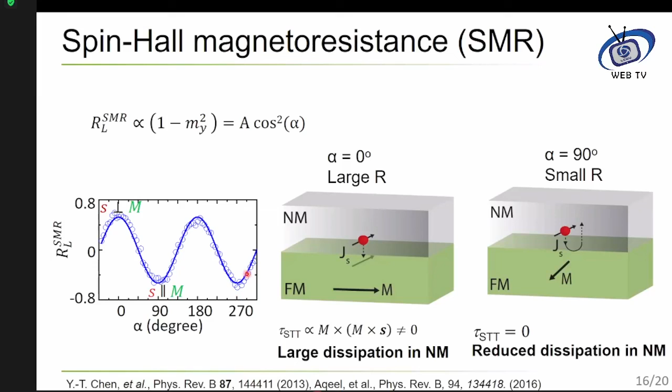With this, we actually just measure the resistance of the platinum metal, and we can tell the underlying magnetization direction. You expect the resistance of the platinum to have a sinusoidal dependence—where it's perpendicular, the resistance will be large, and where it's parallel, the resistance will be small.

Now, the unique thing is that our magnetization doesn't align parallel to the magnetic field all the time. It has a texture, so you expect changes in this periodicity. There's a lot of mathematics involved, but the idea is simple: whenever the electron spin in platinum is parallel, it's small resistance, and when perpendicular, it's high resistance—this tells you if there is a texture or not.

So with this, I just wanted to emphasize that with this simple technique of magnetoresistance, you can detect such complicated textures, and it's not valid only for skyrmions or very complicated things—it's also valid for all other magnetic insulators.